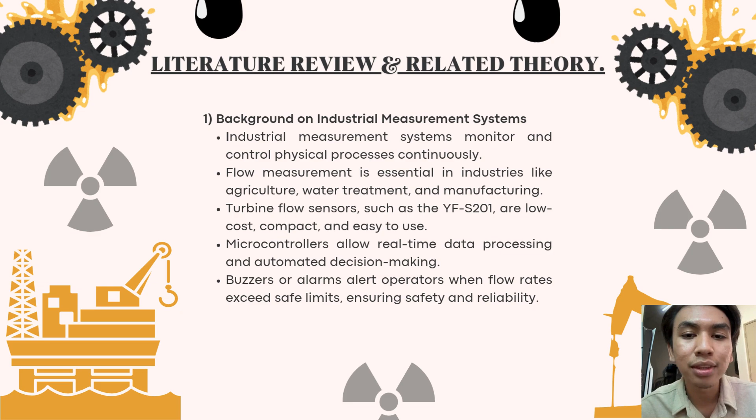Flow rate measurement plays a crucial role in water management, especially in irrigation and plant maintenance. Accurate control of water discharge helps prevent overwatering, which wastes water and damages roots, as well as underwatering, which slows plant growth.

In automated irrigation systems, using a flow sensor allows the system to measure the actual volume of water supplied rather than relying only on time, which can be inaccurate due to pressure changes. Additionally, integrating a buzzer alarm that activates when the flow rate exceeds a set limit improves safety and reliability. It alerts users to possible issues such as leaks or pump malfunctions, enabling quick action.

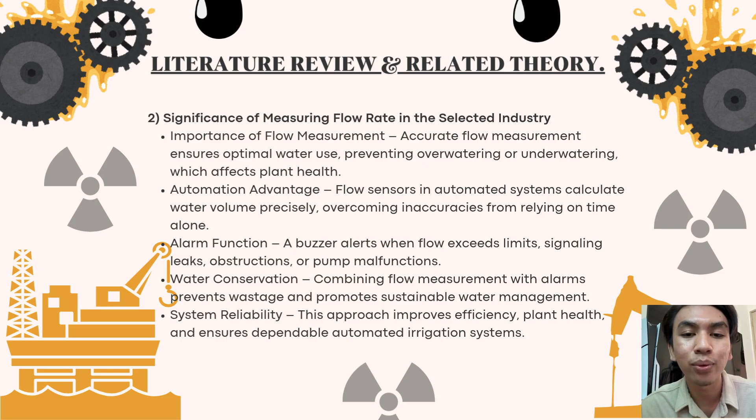In this project, we apply the concept of volumetric flow rate, which measures how much water passes through a system per unit time. Using the YF-S201 flow sensor, water flow is detected as pulses which the Arduino converts into flow rate using a calibration constant. We also apply the continuity equation, ensuring consistent flow by using equal tube diameters and minimizing turbulence.

Additionally, a buzzer provides real-time alerts based on preset flow conditions, demonstrating simple open-loop control. Overall, the system shows how fluid mechanics principles can be effectively integrated with embedded electronics to create a functional and user-friendly smart irrigation solution.

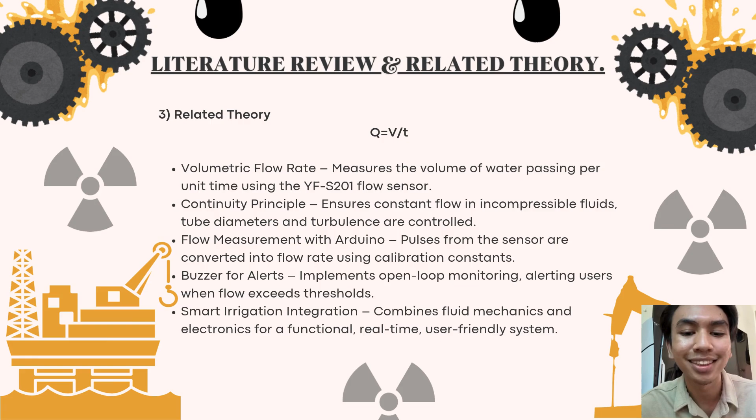So now I will explain about our system development and description. So the first part is system overview and block diagram. Okay, this system is an Arduino-based water flow measurement system designed for industrial process control and smart irrigation applications. The main function of the system is to measure the real-time water flow rate using a water flow sensor and to provide monitoring and alert functions.

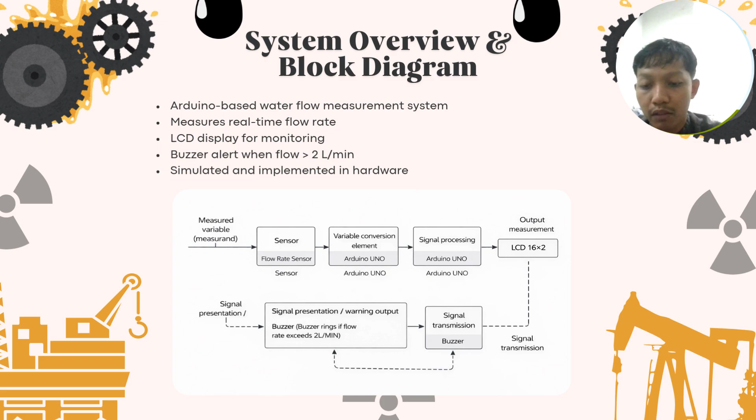The system continuously measures the flow rate of water and displays the value on an LCD screen for easy monitoring. A buzzer is also integrated into the system as an alert mechanism. When the flow rate exceeds the preset limit of 2 liters per minute, the buzzer will automatically turn on to indicate a high flow condition. This system was first simulated using Tinkercad to verify its functionality and later implemented using real hardware to validate its practical performance.

Alright, next for the sensor analysis, our system used the YF-S201 water flow sensor. This sensor was selected because it is simple, reliable, low cost, and suitable for low to medium flow rate applications. The YF-S201 works by converting the physical flow of water into a digital electrical signal. When water flows through the sensor, an internal rotor spins and generates a pulse signal. The frequency of the pulse is directly proportional to the flow rate.

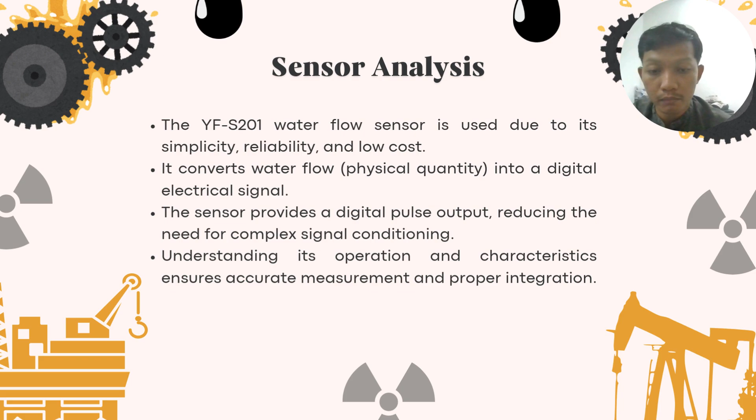Since the sensor produces a digital output, complex signal conditioning circuits are not required. Understanding the operation and characteristics of the YF-S201 sensor is important to ensure accurate measurement and proper integration with the Arduino system. Next, I will explain the signal processing and operation of the Arduino.

The Arduino Uno R3 acts as the main signal acquisition and processing unit in the system. It receives the digital pulse signal from the YF-S201 flow sensor through an interrupt-enabled pin. This allows accurate pulse counting even at varying flow rates. The Arduino counts the number of pulses over a fixed time interval and converts them into flow rate values in liters per minute using a predefined calibration factor.

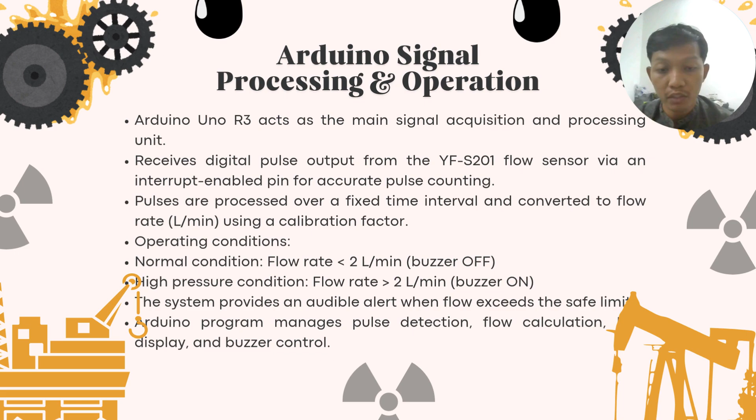Alright, next. Before implementing the system in real hardware, the circuit and logic were tested using Tinkercad simulation. The simulation was used to verify correct wiring connections between the Arduino, flow sensor, LCD, and buzzer. It also helped confirm proper pulse counting from the sensor and accurate flow rate calculation. In addition, the simulation validates the LCD display functionality and ensures that the buzzer activation logic works correctly when the flow rate exceeds the set limit.

The simulation stage helped minimize errors and ensure that the system functions correctly before moving to real hardware implementation. After successful simulation, the system was implemented using real hardware. A water pump was used to circulate water through the YF-S201 flow sensor to enable real-time flow measurement.

The sensor output was connected to the Arduino Uno, which processes the signal and calculates the flow rate. The measured flow rate is displayed on the LCD screen for easy monitoring. To prevent electrical interference, the water pump was powered separately using a 9-volt battery, while the Arduino system used its own power supply. The LCD and buzzer were mounted in visible and audible positions to ensure clear display and effective

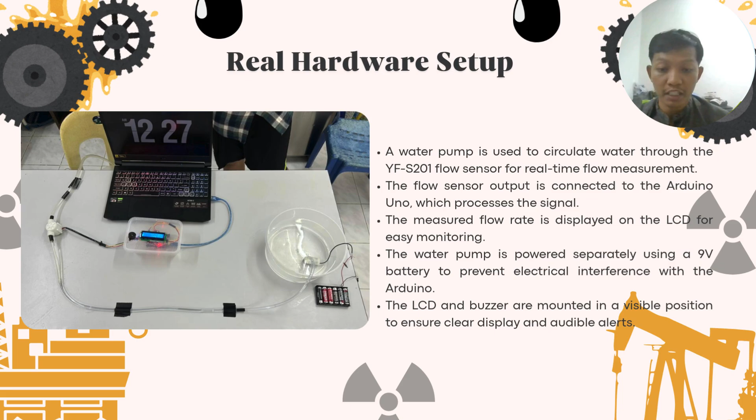alert indication during operation. And finally, I will explain the calibration method and process used in the project. Calibration is important to improve measurement accuracy and ensure reliable system performance. In this project, calibration was performed by comparing the sensor pulse output with a known volume of water.

A calibration factor of 7.5 was used to convert the pulse frequency from the YF-S201 sensor into flow rate values in liters per minute. By applying this calibration factor, the system is able to provide more consistent and accurate flow measurement, making it suitable for practical industrial and irrigation applications. So for the next slide, we will show you our project demonstration.

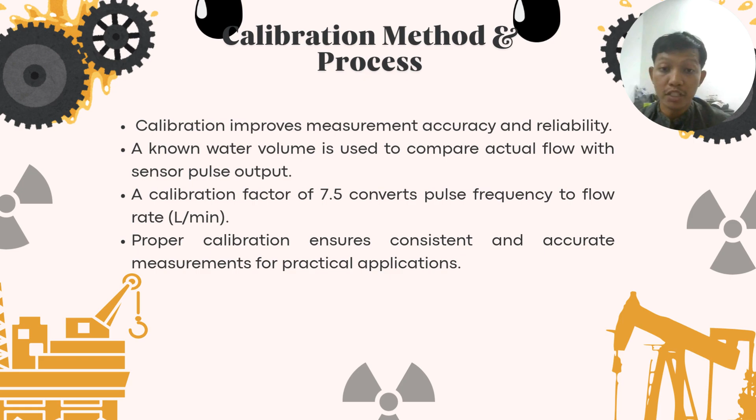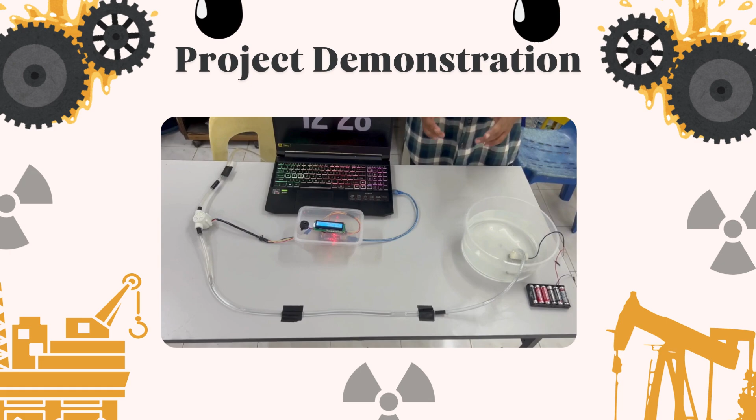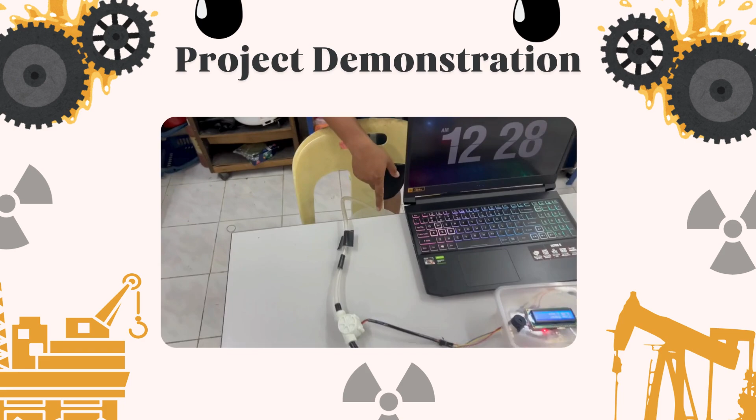Today, we will be presenting our group project titled Water Flow Measurement. For this project, we are using the following components: a 9-volt battery, DC water pump, PVC tube, water flow sensor, water container, project box, Arduino Uno, LCD display, and lastly a buzzer. We have connected the system to a laptop that has been preloaded with the necessary code to power and operate our Arduino Uno.

So now we will proceed with our experiment. Alright, so for our project, the buzzer will only activate after the flow rate reaches 2 liters per minute.

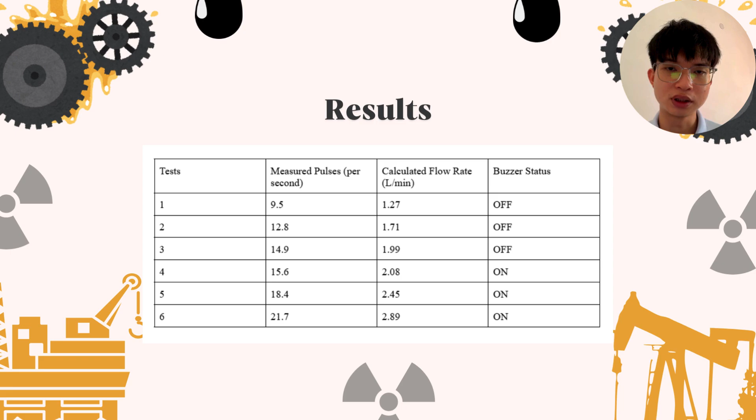At test 5, the measured pulse is 18.4, the calculated flow rate is 2.45, and the buzzer is now on. At test 6, the measured pulse is 21.7, the calculated flow rate is 2.89, and the buzzer status still remains on.

So based on the result, we observed that when the flow rate was below 2 liters per minute, the system operated under normal condition. The LCD displayed the real-time flow rate value and the buzzer remained off, indicating that the flow rate was within the safe operating range. Once the flow rate exceeded 2 liters per minute, the Arduino detected a high flow condition.

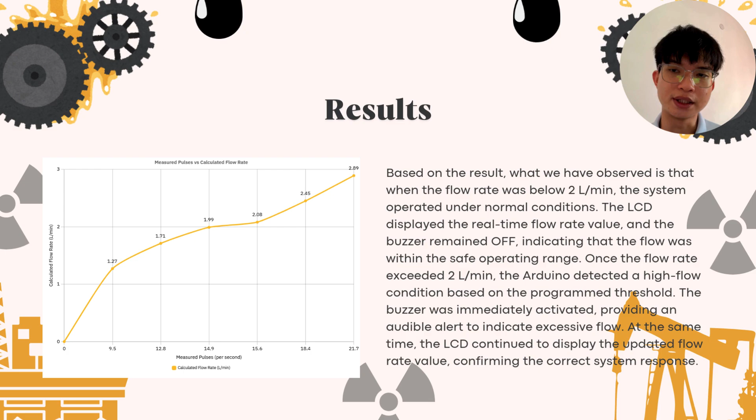Based on the program threshold, the buzzer was immediately activated, providing an audible alert to indicate excessive flow. At the same time, the LCD continued to display the updated flow rate value, confirming the correct system response. So what you can see here is the graph. As the measured pulse increases, the flow rate also increases.

During the discussion, we discussed that the main challenges of this experiment are low measurement accuracy, unstable readings, and sensitivity to flow conditions such as turbulence, air bubbles, vibration, and temperature changes. This issue occurred because the YF-S201 sensor relies on mechanical rotation and an approximate calibration factor, which may not match real experimental conditions.

For future projects, the experiment can be improved by performing a proper calibration using known volumes of water, installing straight pipes to ensure smooth flow, applying software filtering to reduce noise, adding temperature compensation, and using a higher quality sensor when better accuracy is required. This discussion also highlights that

instrumentation is very important in measurement, as the choice, installation, calibration, and maintenance of instruments directly affect the reliability and validity of experimental results. Proper instrumentation ensures accurate, consistent, and trustworthy data, which is essential for sound analysis and engineering decisions.

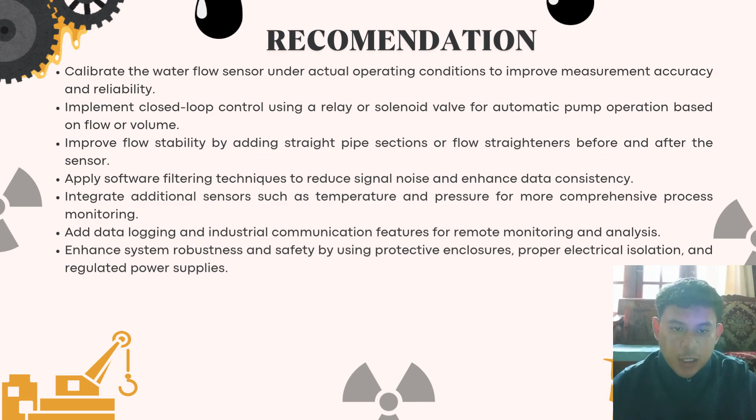After that, flow stability is improved by adding straight pipe sections or flow straighteners before and after the sensor. Software filtering is applied to reduce signal noise and ensure consistent data output. Additional sensors such as temperature and pressure can be integrated for more comprehensive monitoring. Data logging and communication features enable remote monitoring and analysis.

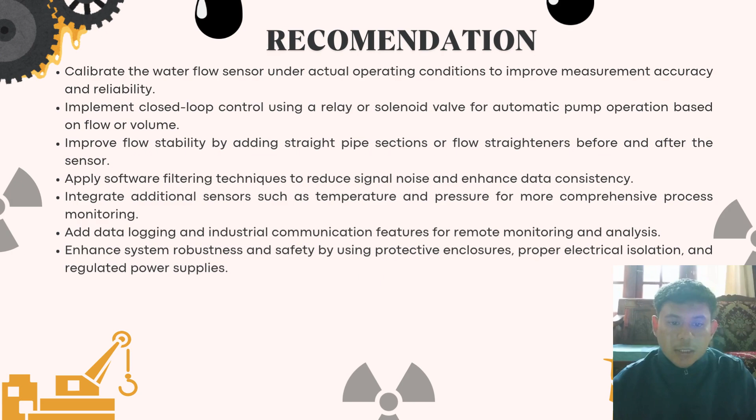Finally, system robustness and safety are enhanced through a protective enclosure, proper electrical isolation, and regulated power supplies. In conclusion, this project successfully developed an Arduino-based water flow monitoring and control system for industrial application. The system was able to accurately measure flow rate and total water volume in real time using the YF-S201 water flow sensor and Arduino Uno.

Experimental results show good agreement between theoretical and measured values within acceptable engineering limits. Overall, the project achieves its objective and provides a strong foundation for future improvements such as closed loop control and additional sensor integration. Thank you.